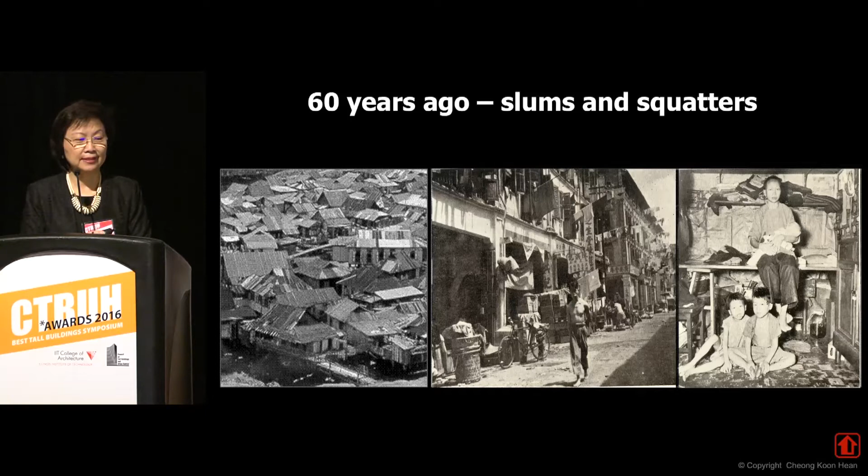Just 50, 60 years ago, this was Singapore. Hard to believe, right, for those who have visited us. We face a lot of challenges. We're land and resource constrained, but we're not just a city, we're a country, which means we have to cater for everything a country needs. So how do we deal with these challenges? Today I'd like to talk about some of the strategies we use to make Singapore a livable place.

The first strategy that is very important to us is to adopt holistic, long-term strategic planning. We are strong believers in planning because we don't have a lot of land and we have to be very careful with our resources.

So we do a very long-term plan where we look into the development of Singapore over a horizon of 30 to 40 years, and we do this every 5 to 10 years, and then we cascade the plans into detailed plans that have a 15-year horizon.

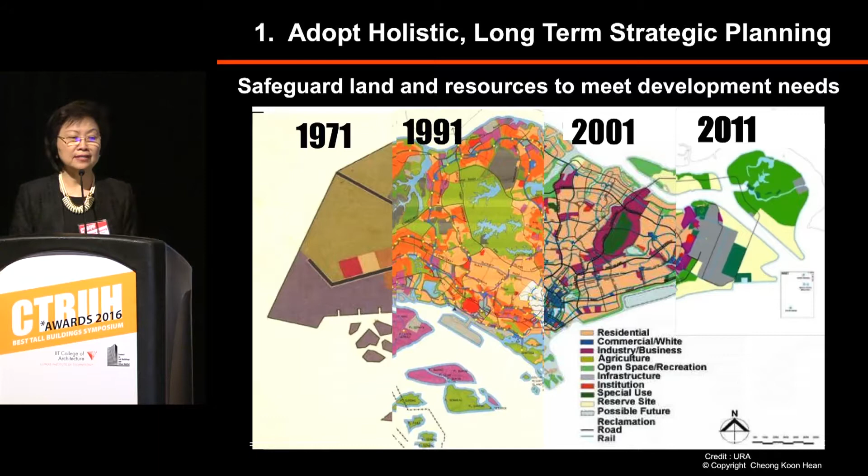Why is this important? Because it really helps us prioritize infrastructure investments for economic and social development. It ensures we have enough land, and it ensures we know where to put our resources for the infrastructure needed for development.

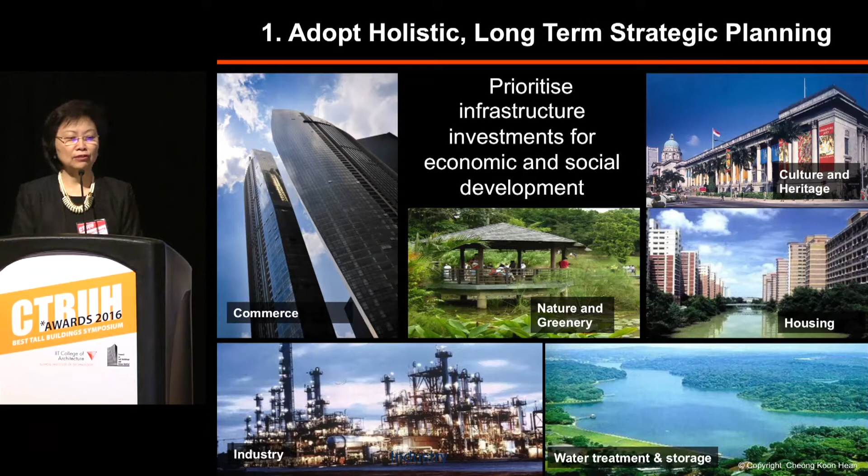Second, we harness innovation and technology to optimize our resources. We use technology to create land. We now reclaim land into the deepest parts of the sea, and we also look into underground rock caverns to create land for storage, for example.

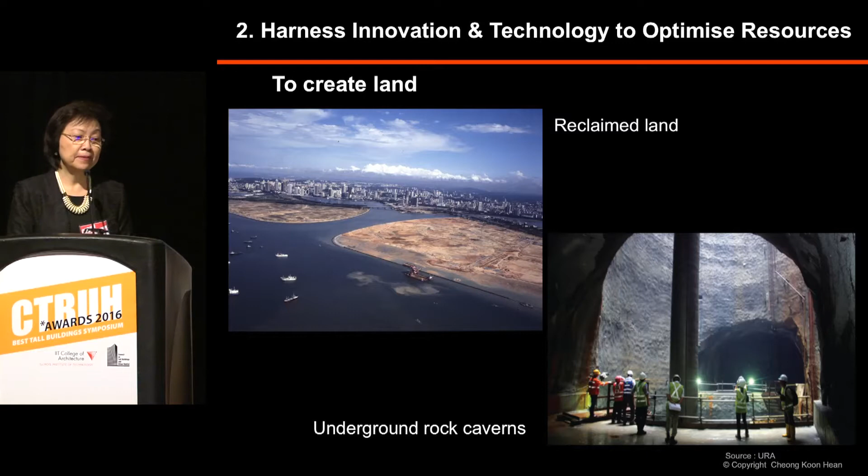A very good example of harnessing innovation and technology is to achieve self-sufficiency in water. You can appreciate we're very small, but we have 4 national taps for water. The first tap is local catchment water.

We pray very hard so that it will rain, and then we make sure we collect almost every drop that falls from the sky. We have to import some water from our neighbors, Malaysia. And as 2 sovereign nations, eventually we cannot keep importing water from Malaysia because they will also need water. So we want to become fully self-sufficient in time to come.

So we developed a third tap called New Water, which is really recycled water using membrane technology. And of course, the 4th tap is desalinated water.

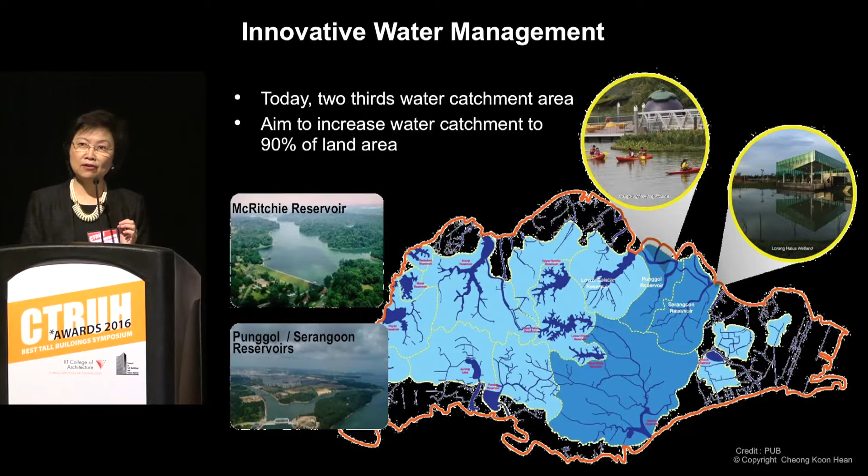So what we do today is collect almost everything that falls from the sky, and we aim to increase our water catchment to 90% of the land area. Almost everything is captured, and we use technology to recycle water.

So we built this thing called a deep tunnel sewerage system, which is a deep tunnel about 10 to 30 stories below ground. By gravity fall, we collect everything. It goes to a water reclamation plant, and through membrane technology, we're able to recycle almost everything, reuse water.

This has been important because it also freed up 1,000 hectares of land by removing all pumping stations in Singapore, so we saved a lot of land as well. Now, this means Singapore has managed to close the water loop. We have the circular economy, a circular water loop, because we recycle and reuse everything.

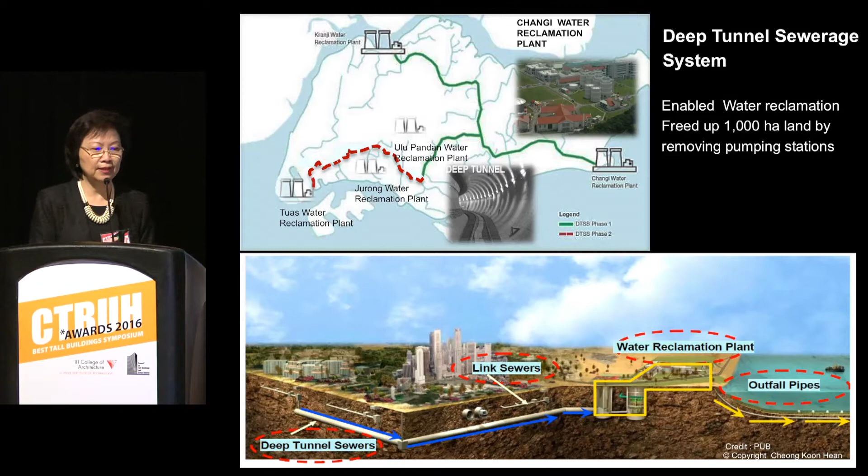Next strategy: we plan for a very compact and transit-oriented development. No choice, we are very dense. And we decentralize a lot of our commercial nodes, very well served by public transport, so that we do not congest the city area.

This means we have to put in a lot of rail lines, and we're investing about $150 billion to double the rail network from about 178 kilometers to 360 kilometers by 2030. The rail network will then be almost as dense as maybe London's and New York's rail network, and we want to discourage the use of cars.

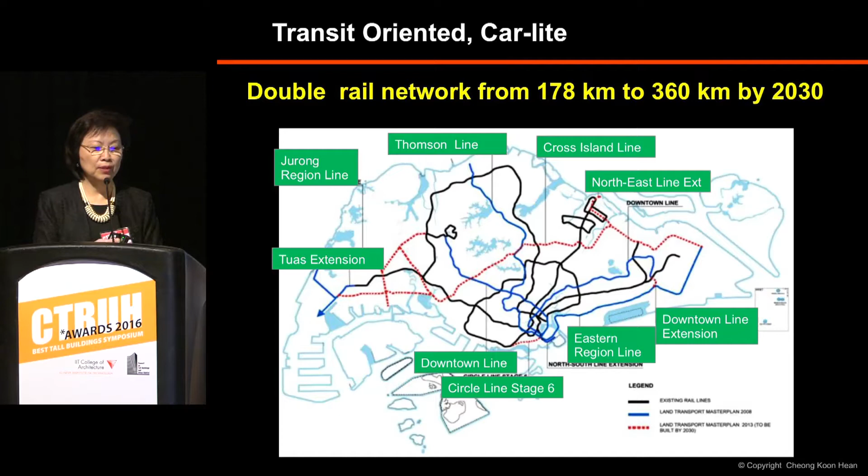So since the 1970s, we have already introduced congestion pricing. But now we're looking into the next generation electronic road pricing system using GPS satellite technology.

We're currently also test-bedding autonomous mobility on demand and electric vehicle car sharing. In fact, we're testing autonomous buses in Singapore. That's what we're going to look at.

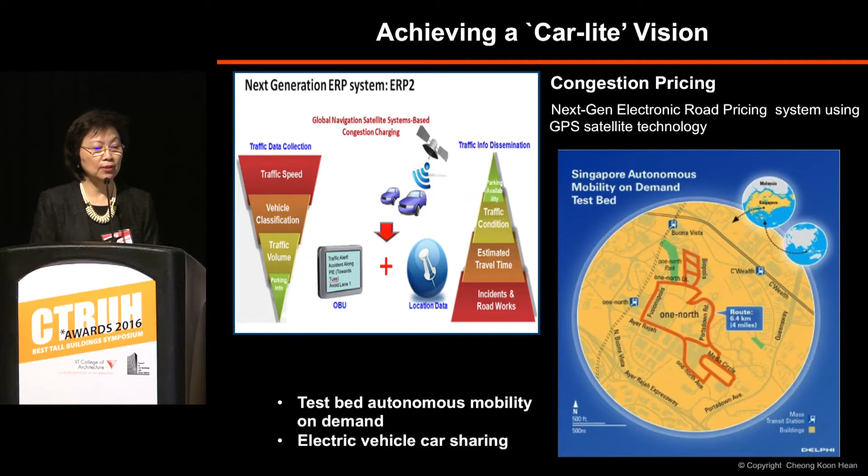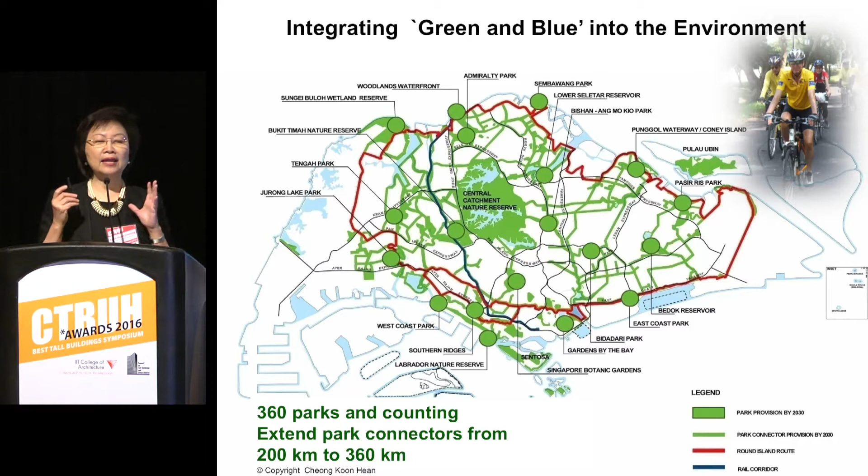The fourth strategy is to aim for a very sustainable and livable environment. In a very dense place, this is absolutely necessary. We have a Sustainable Singapore Blueprint which guides a lot of what we do, with aspirations like eco-smart enduring towns, a car-lite Singapore, a zero-waste nation, a leading green economy, and an active and gracious community. So integrating green and blue elements into the environment is very important for us.

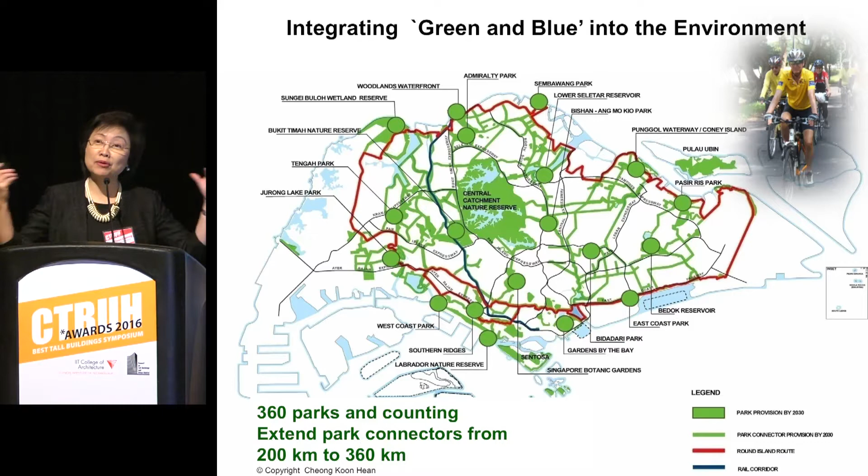We have something like 360 parks in this very small place, and it keeps increasing. We link them up with park connectors, because linking up greenery creates the illusion of space. They don't stay small parks - they become huge parks when you link them up. And we are starting to convert a lot of these traditional concrete canals into naturalized waterways and greenery.

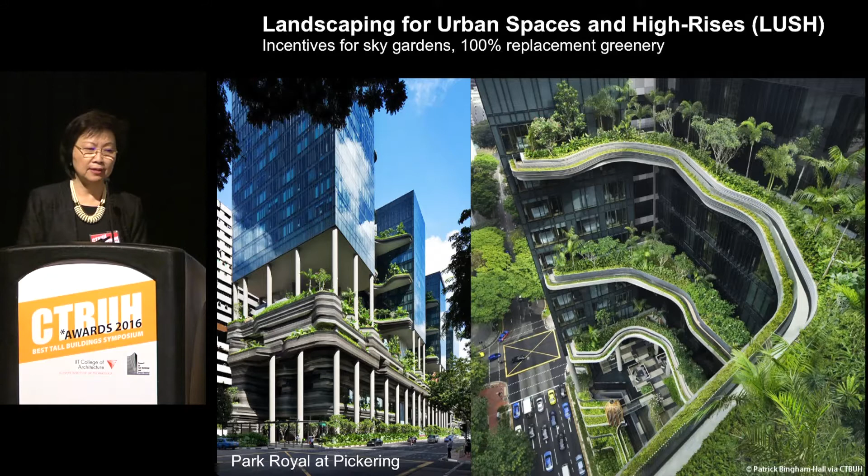We are bringing a lot of the landscaping up into the sky. We have this program called Landscaping for Urban Spaces and High-Rises. I introduced this program when I was CEO of the Urban Redevelopment Authority. We give a lot of incentives for sky gardens, and we also have this interesting idea of 100% replacement greenery - everything you take from the land, you put it back onto the sky.

We've introduced a lot of biodiversity. In fact, Singapore, being a very urban city, has actually developed an urban biodiversity index, which has been adopted by the United Nations. My National Parks Board colleagues do a very good job retaining whatever we have. If you have not visited Singapore, I welcome you to visit us. We actually have a primary forest right in the middle of Singapore with a lot of biodiversity species there. And of course, we want to develop a culture of excellent design and architecture, which sets the stage for all the wonderful buildings built by architects and developers.

Now, how do we apply all these ideas? I'm just going to cite two examples. One is Marina Bay, the new city extension that I worked on. Through long-term planning, we already reclaimed land in anticipation of the growth of the city, and we reclaimed this land since the 1970s. But in the 2000s, we decided it's time to move into the city.

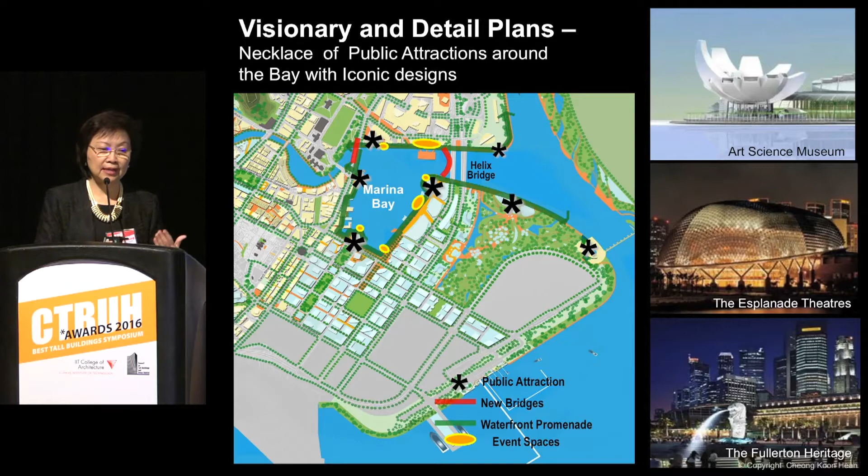So we seamlessly grew the city into the reclaimed land area, and we wanted the city to be vibrant, a 24/7 live-work-play destination. We developed a lot of very detailed urban design plans, and we wanted the plans to be very visionary. So we had a necklace of public attractions around the bay, built with iconic designs and interesting uses like theaters and art science museums.

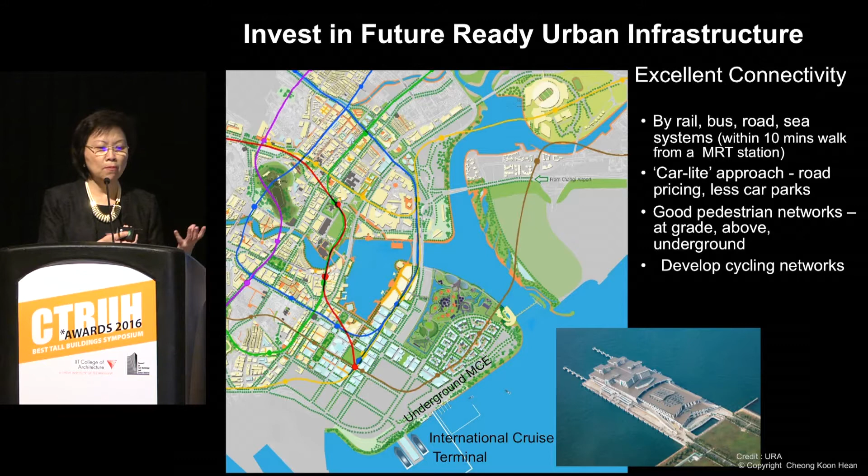And we invested in future-ready urban infrastructure to develop excellent connectivity. So when you're in the city, you can move around by rail, bus, road, and sea systems - that's where we have the International Cruise Terminal. We want a car-lite approach; it's very well served by rail lines, and we are bringing in all the cycling paths. You're no more than 10 minutes' walk from a Mass Rapid Transit station.

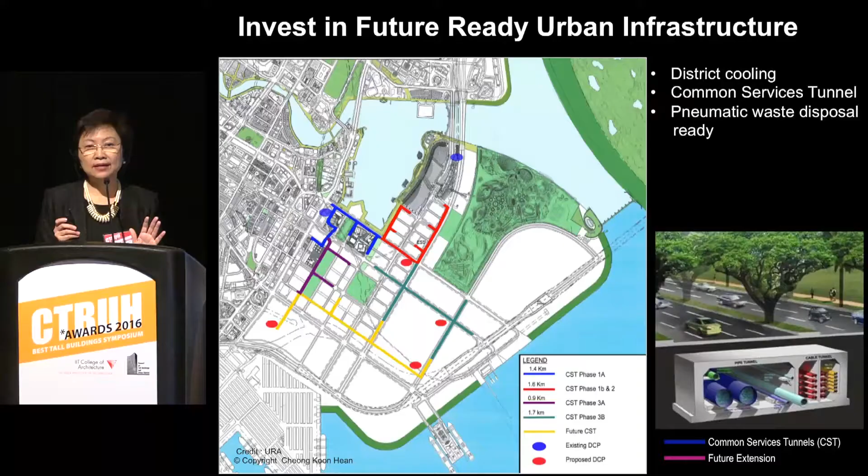Now, what we did was we brought in district cooling, and Singapore now has, I believe, the largest district cooling system in the world for its city center. I also brought in the idea of the Common Services Tunnel - not such a new idea, you see it in some bigger cities, but it has been an excellent investment because we put in a tunnel larger than the Mass Rapid Transit tunnel and put all the utilities there. Cities take 10, 20, 30 years to grow, so now we can build the city progressively, improving and increasing utilities without digging up any roads. It was a very good investment for us.

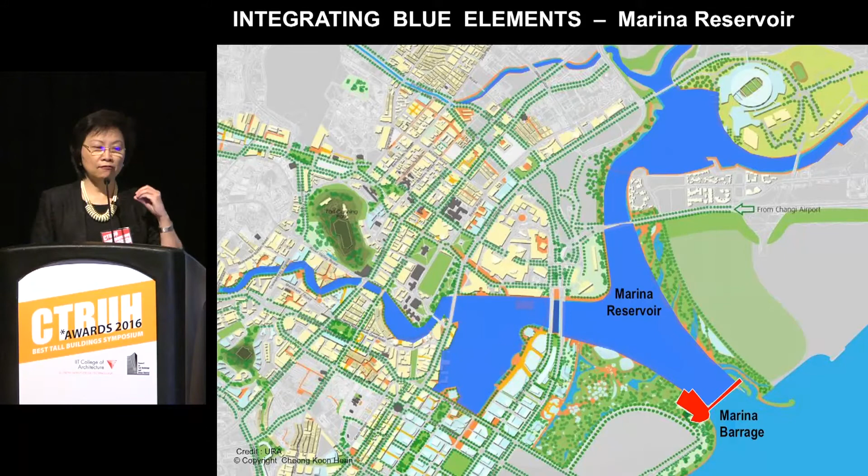I talked about integrating blue elements and the idea of collecting every drop of water. So what we did was put a marina barrage at the Marina Channel, and we converted all the inland water bodies into a freshwater reservoir, bringing in the blue elements. It's beautiful because we now have a stable water level, which creates a lot of great recreation facilities and makes the city look a lot more beautiful.

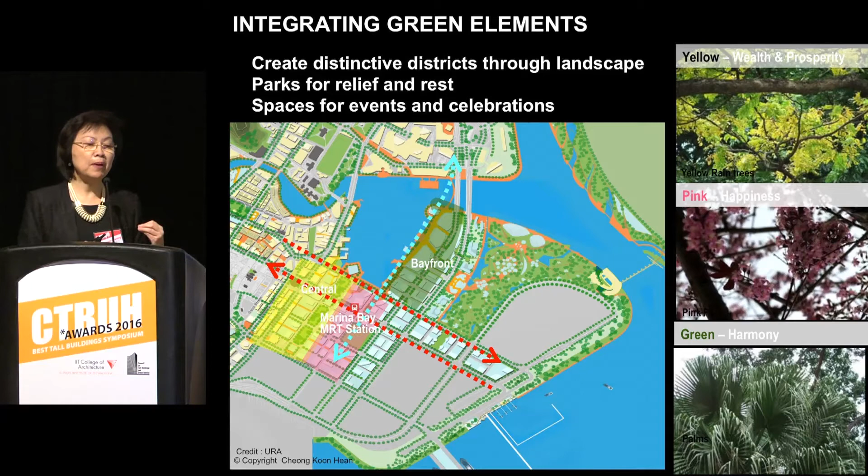And we again also integrate green elements, so we have distinctive districts with distinctive planting through different landscaping for the different districts. I talked about the 100% greenery replacement policy - everything we remove from the ground, we bring up towards the sky in sky-rise gardens. So we incentivize a lot of the greenery. This Duo Residences project, the one you see here, is an artist's impression - I think it's just topped out. It should be completing sometime this year, if not next year.

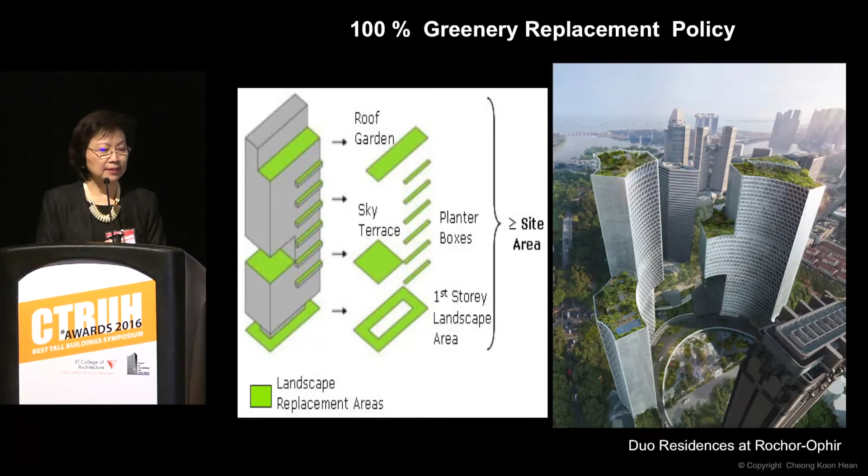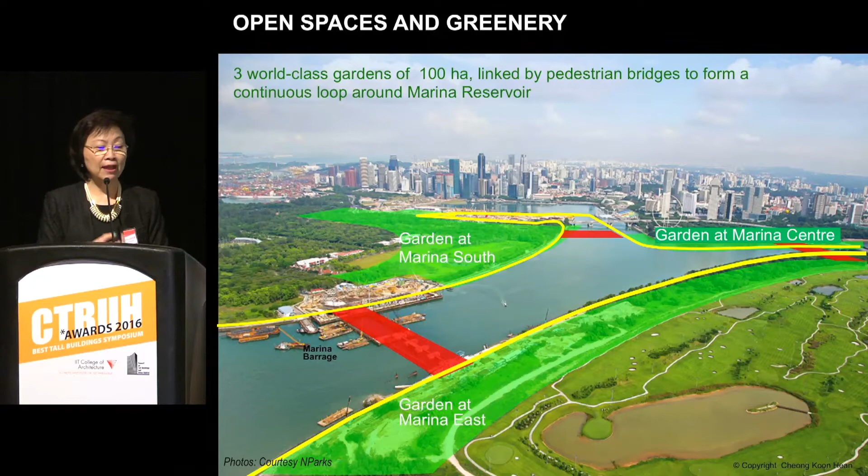Another thing we did was we took a very difficult decision by putting 3 world-class gardens of 100 hectares, linked by pedestrian bridges, right in the heart of the city extension. There was a lot of persuasion by the planners, and fortunately the political leaders accepted that we have to have this prime land for parks because it served as a green lung for the city.

And so we developed Gardens by the Bay. It's a beautiful garden. It has 2 cool domes. We don't need a greenhouse because Singapore is a natural greenhouse, so we need cool houses. And in each of these domes, it's very different.

We have the flower dome, which features changing flower themes and Mediterranean plants. And we have the cloud forest, which features plants from the tropical highlands with a mini waterfall. So if you do come, do visit. It has something like 250,000 species of plants in this garden alone.

So we have very good gardeners in Singapore. And the Gardens by the Bay won the 2012 World Architecture Festival Award when it first opened.

Now you see some of these tall trees, we call them super trees. They're not decorative, they're actually chimneys, and on top of one of them there's a restaurant, because underneath the garden is a waste-to-energy generation plant.

There are 3 million trees in Singapore. We collect all the plant twigs and leaves and we burn them underneath the garden in this plant to generate energy to help cool the domes, so that we reduce energy use.

And of course, design excellence. We believe in great urban design and to shape the city with urban design guidelines, and we guide the way in which all your beautiful buildings are placed in the city.

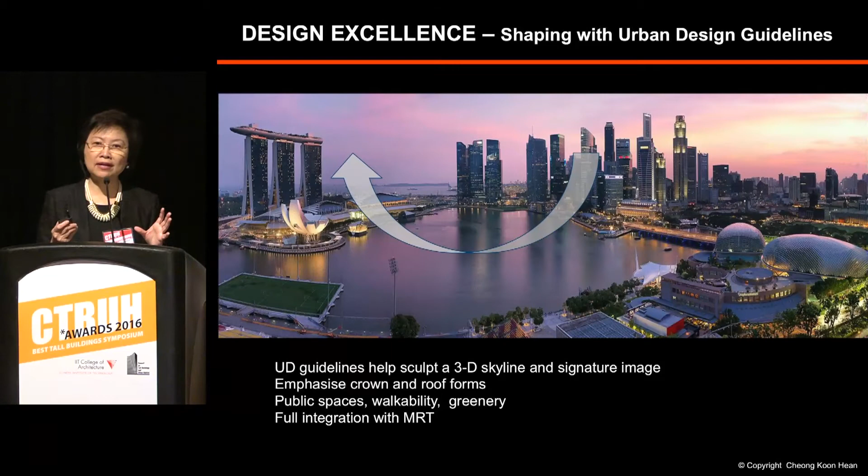We looked at how to sculpt the skyline to give it a signature image. We emphasized the crown and roof forms. We looked at public spaces, walkability and greenery, and we fully integrate all the developments with the mass rapid transit system underneath the city. And then you have beautiful projects.

This was done by Moshe Safdie. We worked very closely on this project. If you work in Singapore, well, when I was doing this project, I met with Moshe Safdie every 6 weeks, so that his building is fully integrated with the city infrastructure.

And of course, night lighting, very important. We incentivize basic and festive lighting by giving developers floor space incentives. So the city lights up for festivals with festive lighting, and then there is a basic lighting, because we don't want to overlight the city.

Many cities are actually a little bit overlighted. We want the lighting to be elegant and to be beautiful. But cities is not just about making a place. It's not just about a space, but it's about making places.

And so we want the entire Marina Bay to be vibrant and active. So it is a sports venue. We bring in a lot of regattas and extreme sailing series. And we brought in the first Formula One night race in the world.

I think it is still the first night race in the world, and we brought it right into the heart of the city. So the entire route for the Formula One race is lighted up. This is a fantastic view.

When the race first started, I was not looking at the Formula One cars. Anyway, they zip by in half a second and you see nothing. But I was looking at the view from the top when the helicopter was flying over the city, and this was very exciting, particularly for the planners.

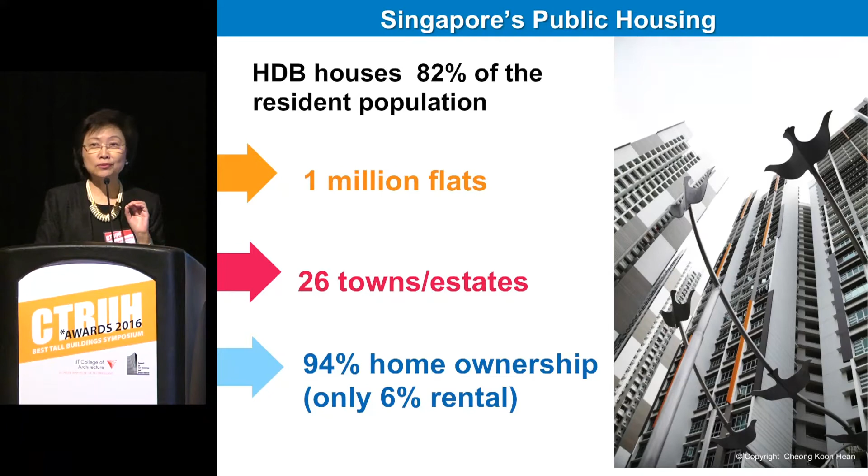94% of the people actually own their own homes. It's not like council or social housing here. There's only 6% rental. And we want our housing to be well-designed and community-centric, sustainable, and smart.

This is a picture of a typical public housing town. I want to illustrate with one example how we plan the town using some of these urban design and planning ideas. This is Punggol, with about 100,000 units, a new town along the waterfront.

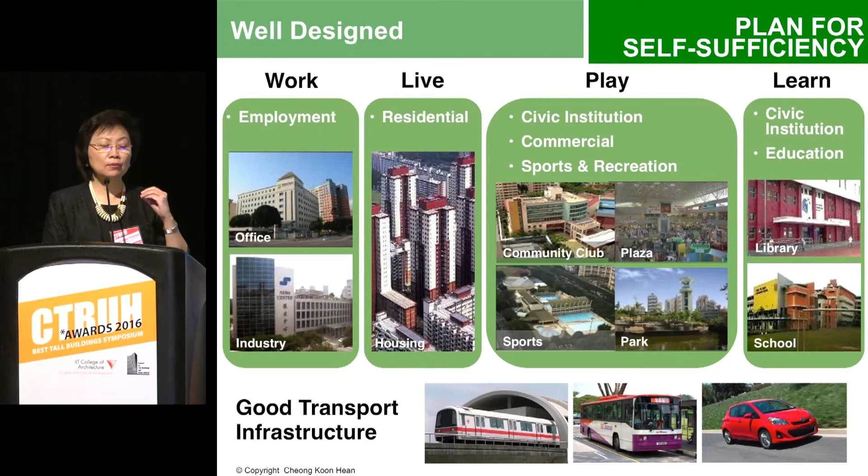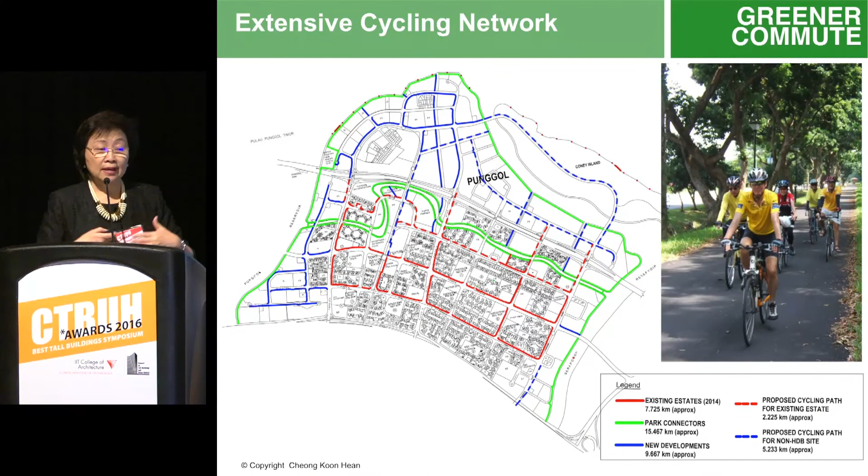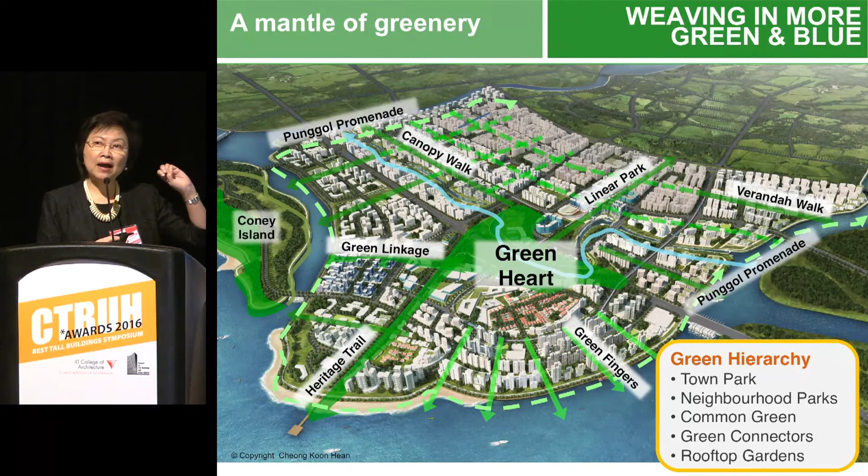We always plan our towns as a work, live, play, and learn environment comprehensively with all facilities within it. It is transit-oriented and car-lite, very well served by rail lines. You are no more than a 300-meter walking radius from any station. We bring in an extensive cycling network, and we put in pervasive greenery into the town, with parks of different sizes and different hierarchies.

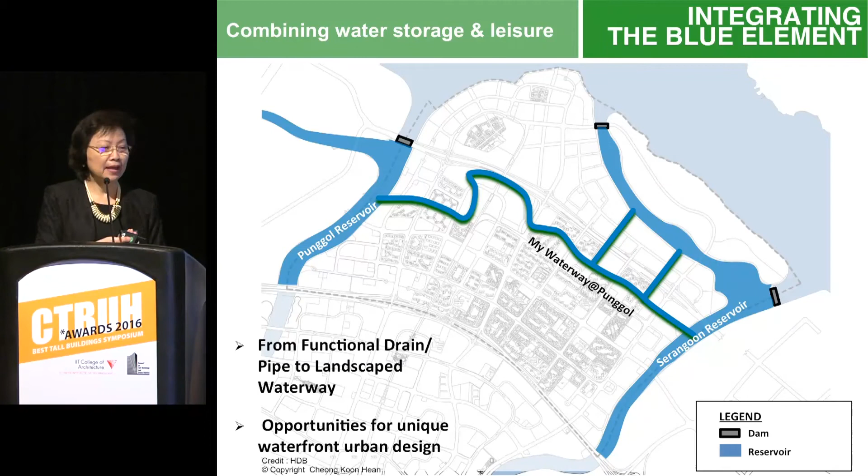For example, we bring in the water element. We dammed up 2 of the rivers and converted them into freshwater reservoirs, and we decided we needed to link them. My engineers said link it with a pipe to balance the water. I said, no, why don't we bring in a river? And we did that, and the river became a wonderful recreation facility for the town.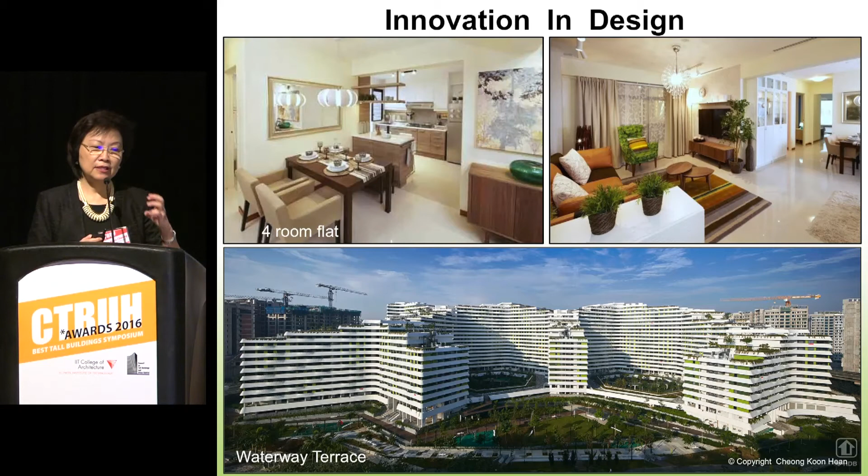We look a lot into the design, both in terms of the external architecture, public spaces, and also the internal unit. This is what a typical social housing unit in Singapore looks like.

We have a sustainability framework which guides the development of the town. I won't go into detail since many of you know about this, but we focus on environmental, social, and economic considerations in the design of the town. We have clear strategies, clear initiatives, and clear KPIs which we target to hit. This fits in with the National Sustainability Blueprint Framework, so we contribute to sustainability in Singapore.

Of course, to be sustainable, you have to harness technology. We do a lot of research in energy, urban greenery, waste and water, in the living environment and building technology. I have no time to go into this, but for example, we are the largest procurer of solar in Singapore.

Recently we introduced an additional layer on top of sustainability called a smart town framework. Singapore is quite suitable to become a smart city, not just a smart city but a smart nation, because we have brought broadband to almost every home and we're bringing fiber to every home, including every public housing flat. We are wired up, and we have phone penetration rates of almost 90%. So it's quite suitable to develop a lot of smart applications.

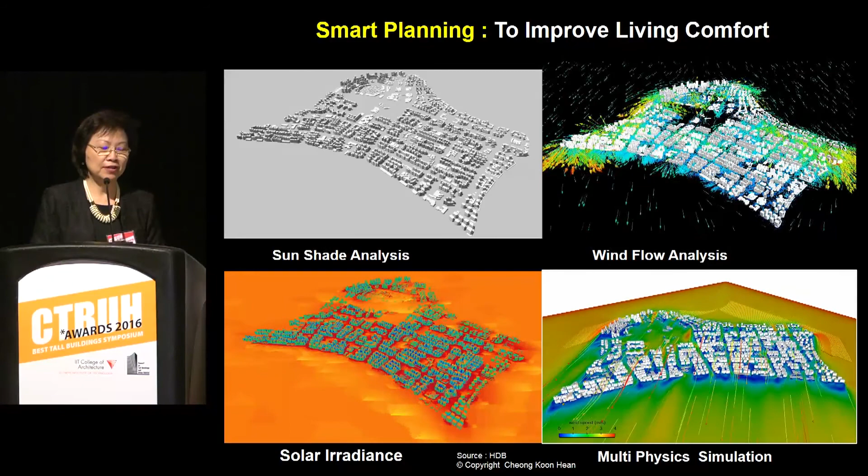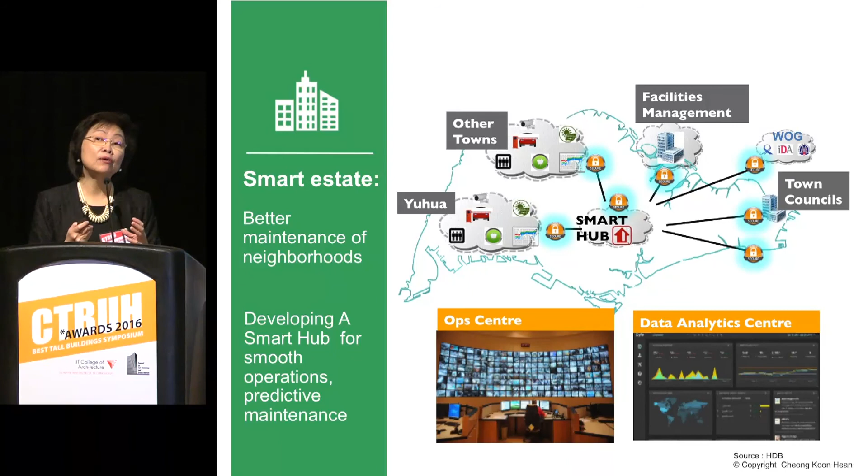Finally, smart living, where we're looking at a lot of applications that we're going to bring into the home, because all our flats will be smart enabled, ready to receive the smart applications that will be provided by a lot of commercial companies, for example. We will be looking into elder care, safer homes, energy savings, and telehealth in the home. So these are some of the things we're looking at.

So overall, after 50, 60 years, we are okay. I think we have improved quite a bit, and this is where we are. We continue to work hard to keep improving the small place that we have.

I want to conclude by saying that as an architect, it takes me 3 years to build a building. But as an urban planner, it takes me 30 years to shape a city. So we need a lot of patience and perseverance. Thank you.